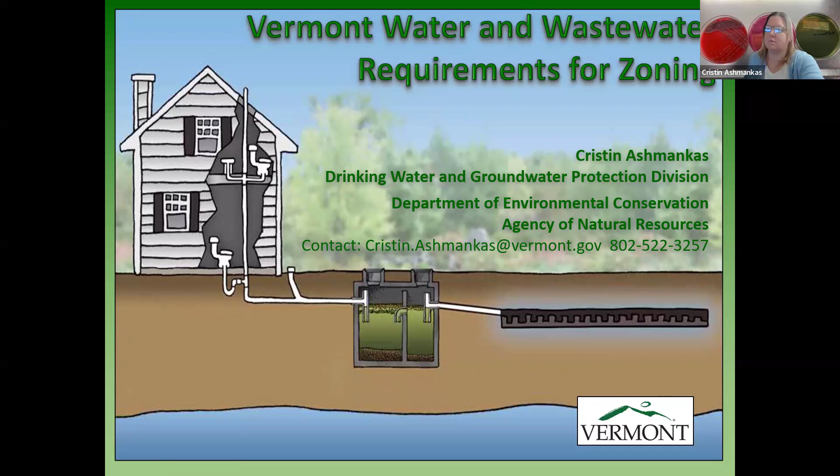Sorry, we were required to turn our keyboards in to the state of Vermont, and so I am waiting for my keyboard, my new one, to arrive from Amazon. So it's an unusual setup for me.

I am representing today mostly the wastewater system and potable water supply program. We refer to it as the WW program. It is a regionalized program with 5 offices around the state. In St. Johnsbury, we have 1 regional engineer. In Essex, Montpelier, Rutland, and Springfield, there are 2 regional engineers assigned to each office.

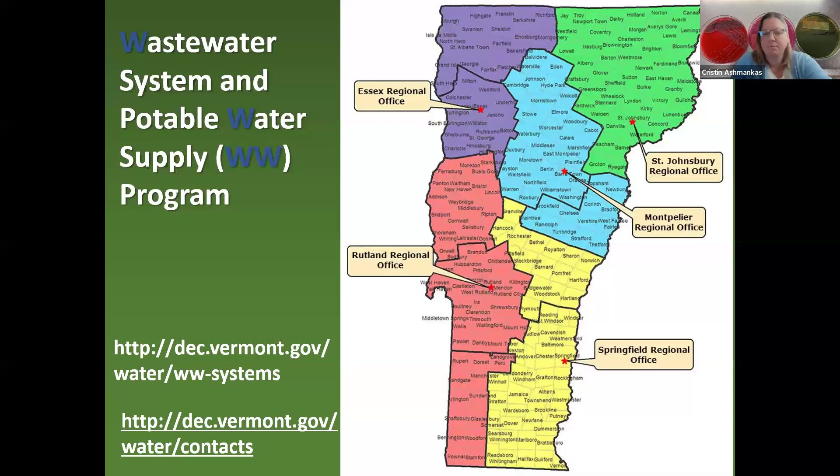The wastewater system and potable water supply program regulates all soil-based wastewater systems and water supplies for wastewater flows less than 6,500 gallons per day. It's not that when you reach 6,500 gallons per day it suddenly is not allowed, it's that it jumps up to the indirect program. The indirect program has some EPA reporting requirements that are not present under 6,500 gallons per day. Those requirements come with a lot of extra costs, extra regulation, extra reporting, so a lot of times people are trying to actively stay below the 6,500 gallons per day.

Potable water supplies are those water supplies that are not public. Public water supplies are typically when you reach 25 users for a supply, it jumps up into the public water supply. This is also sort of a gray area. We start looking at it when there's about 10 connections, definitively when there's 15 connections.

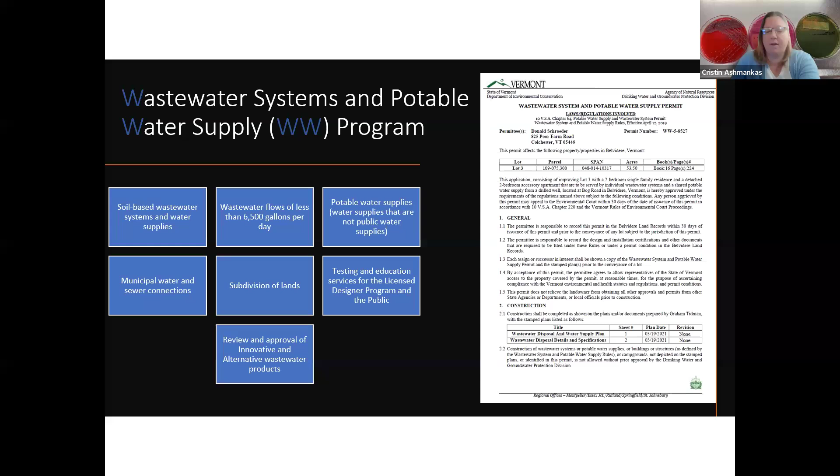Municipal water and sewer connections, subdivision of lands, testing and education services for the licensed designer program and the public, and the review and approval of innovative and alternative wastewater products.

When we look at this, this almost applies to every property in the state of Vermont. At some point in time it will likely connect with the WW program. Our permits run with the land though, so there's a very good chance they only connect with us once. Once they have their water supply and wastewater system approved, there's a good chance that just continues to operate indefinitely. We have about 3,000 permit applications a year. We were down pre-COVID to about 2,500, and since COVID we've actually sustained about 3,000 a year. About 10% of that, or about 300 of those permit applications, are for the replacement of failed wastewater systems - systems that have surfaced, backed up into the home, or reached the waters of the state, which are the definitions of failure, and need replacement of some kind.

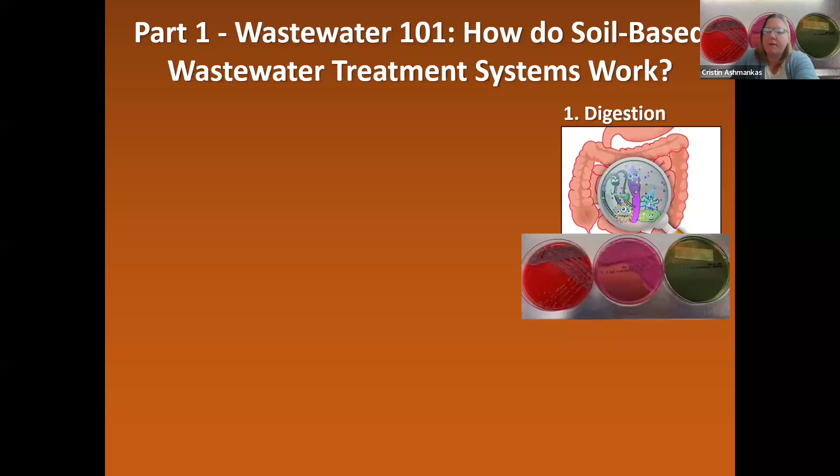A brief overview on how wastewater systems work, since that's what I'm going to focus on first. Wastewater systems start with you, it starts with your gut. You are breaking down solids in your gut into its components for your body to use. That process is mostly an anaerobic bacteria process. Anaerobes are bacteria that thrive in a low oxygen or no oxygen environment, and they are really good at breaking down solids into their components because that's what they're actually looking for - the oxygen and some of the other nutrients. When they do it to the food we're eating, they actually break it down and make it available for us.

About 60% of your solid waste is alive and dead colonies of these anaerobes, so we're putting out into a septic tank or into a municipal system vast amounts of these anaerobes. The first step to most wastewater systems is a septic tank, and that septic tank continues to reflect the anaerobic environment. It's isolated - the solids fall out, we refer to them as sludge, and they're isolated from any oxygen by a layer of water. The fats, oils, and greases, which once they hit the septic tank are referred to as scum, float to the top, further separating you from any oxygen. There's not a lot of turnover, and so this whole system settles out, and the anaerobic bacteria continue to break down solids in the septic tank. It's the reason you don't need to pump the septic tank every year.

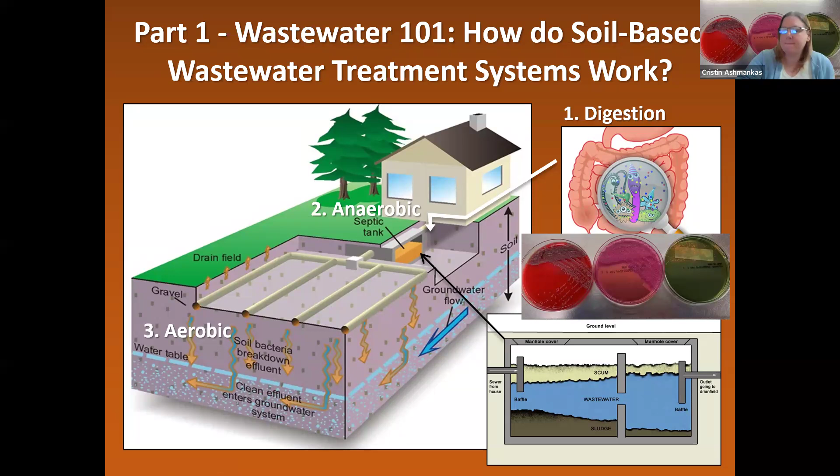Why do we care about this? We are protecting human health and the environment. We're making sure that any wastewater that gets put out is clean before it gets taken up by a potable water supply—that's typically referred to as the 2-year time of travel.

Studies for the last about 120 years have all looked at this. They put a bunch of viruses, cysts, and bacteria in an environment—small environments, large environments, natural environments, lab environments—and it all comes out the same. All the little microbes are really good at trying to dominate each other, so they've all developed ways to kill off their competition.

So if you put them all out there, after about 2 years they've made it too inhospitable for any of them to survive—a complete die-off. So we make sure there's 2 years of travel time between any wastewater getting put out in a leach field and any potable water supply. That's one of the biggest components to some of the infill discussions in the villages—we're trying to keep the water supply and the wastewater system separated enough that it takes 2 years for water from one to reach the other.

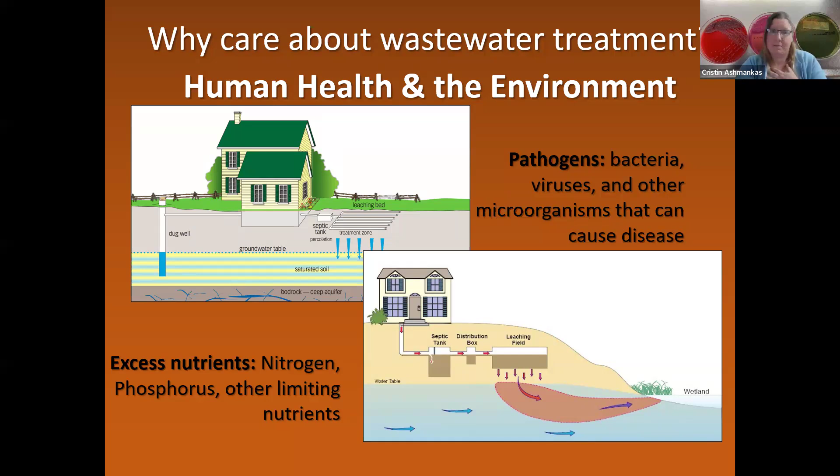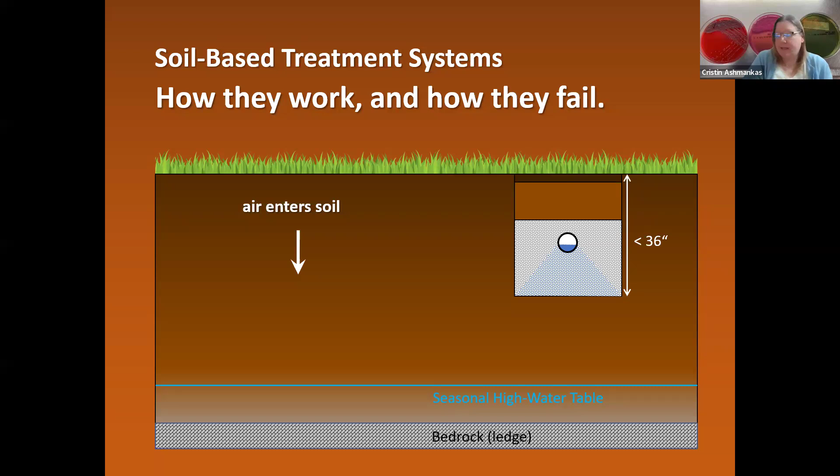Looking at the leach field specifically, we want to make sure that the water is getting dispersed in the top 3 feet, because we know that's where the best oxygen exchange happens. We want the oxygen to be there for the aerobic bacteria. So we make sure the leach field is in the top 3 feet, with 3 feet of separation between the base of the stone and seasonal high water.

If you're not familiar with a leach field, typically a traditional leach field as we now define them in Vermont—there's a wide variety here. I've been out in places where, back in the 1930s, 40s, and into the 50s, people would bury their cars as their leach field and just roll down the windows. So I've seen some interesting leach fields.

But going for the more common definition of traditional, it is a perforated pipe embedded into some stone. The stone acts as both a place for water to run through, and a place for the aerobic bacteria to adhere to as the water passes over it. At the base of the stone, we want to make sure there's 3 feet of separation.

Studies show that most of the nutrients get taken up in the first 6 inches below the stone. So by the time you hit 6 inches below, you're at about 80 to 90% of the nutrients taken up. By the time you hit a foot, you're approaching 100%. Typically by 18 inches, you're at 100%.

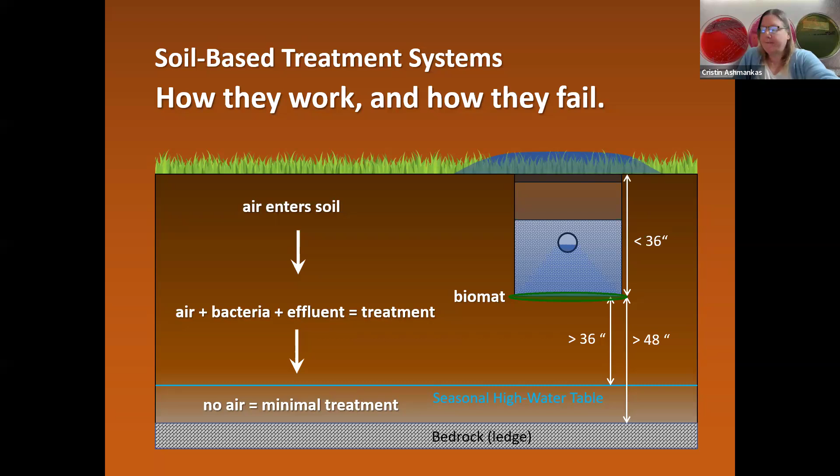So when designing wastewater systems, start with looking at the soils, right? We want to know what the soils can handle, what the soil profile is really going to define everything we can do about a wastewater system on a particular piece of property.

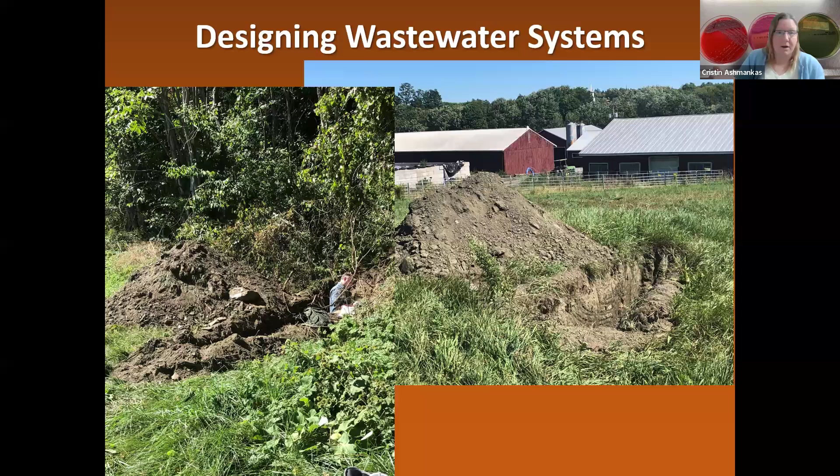So we dig these test pits, and the first thing we look at when we're looking at the test pits is where is seasonal high water? Seasonal high water is typically determined in the state of Vermont by the redoximorphic features within the pit. And the redoximorphic features are that transition from that nice rust color to soils that are depleted in the rust color. The rust color comes from the oxidized iron in soil.

I've been out to sites with the landowner sitting there, and we don't see a lot of the rust color. The landowner is like, well, maybe my soils just don't have a lot of iron in them. Turns out iron is constantly raining down on a geologic timescale and covering the entire planet. About 80% of iron in our soils is cosmogenic in origin, coming from space. Space dust is raining down, constantly covering it and integrating into our soils.

It's the reason why if you go to places that are particularly arid, you'll have beautiful red soils. If you think of arches in the Midwest, a lot of the national parks out there, that beautiful red is because it's nice and arid. There's not a lot of water present, so they hold on to their oxidized iron. Same thing with the loess in China. And if you really start driving around as the geologist and looking at the cross-cuts as you're driving around Vermont, New England, you're going to start seeing that beautiful red color in your soils.

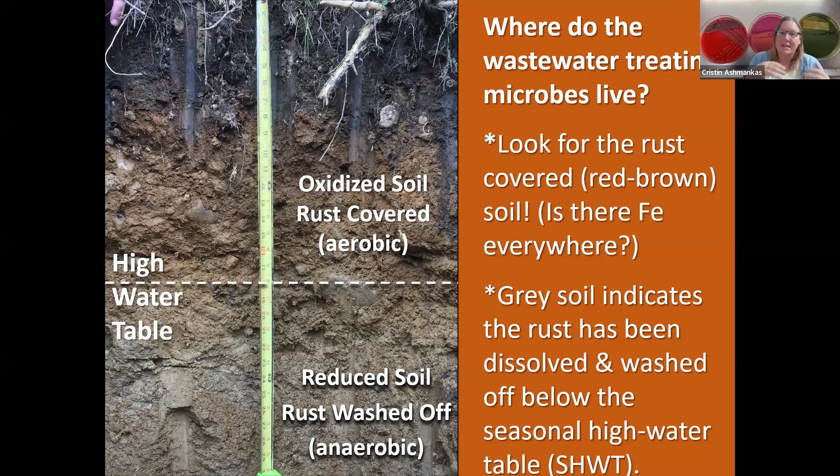We don't want too much sand either, because things will move a little too quickly. We actually like a nice mix of the sand, the silt, and the clay. Just a little bit of clay slows things down, and the sand keeps things moving. We like that nice little variety - that's ideal. That's one of the things we're looking for, what exactly is the texture, because it's going to indicate how much water I can put out per square foot that will be absorbed without surfacing.

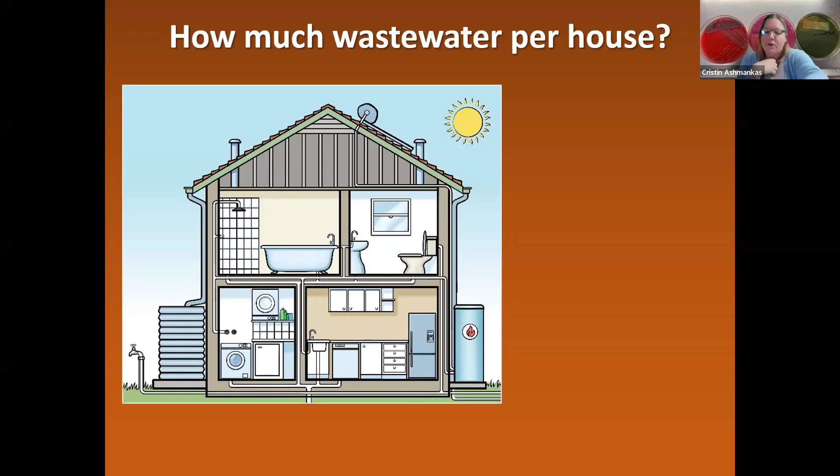Once the soils have been determined, the licensed designer is going to figure out how much wastewater is going to get used, or how much water is going to get used. This is true for both ends, and it's referred to as the design flow. In the state of Vermont, we determined that to be 70 gallons per person per day. I always have people say, I don't use 70 gallons, and I don't typically use 70 gallons on any given day. But you don't want to be using 100% of your allotted design flow, because if you do, that means you'll have a hard time doing things like hosting Thanksgiving dinner, since you won't have enough water to absorb your guests. So you shouldn't be going over about 75% of your design flow on any given day.

I also let people know, I've had a teenager in the house, and the teenager is using 70 gallons per day. So we want to make sure that whoever buys this house, they can move in with a house filled with teenagers, and this system is still going to work for them. Because the teenager's taking the hour-long shower and doing loads of laundry for one shirt, set on the high setting because they don't know how to adjust the water level on the washing machine - we've all been there. They're using their 70 gallons per day. My teenager was not only using her 70 gallons per day, she was using a little bit of my 70 gallons per day too. And our system could absorb it because we have these factors of safety built in.

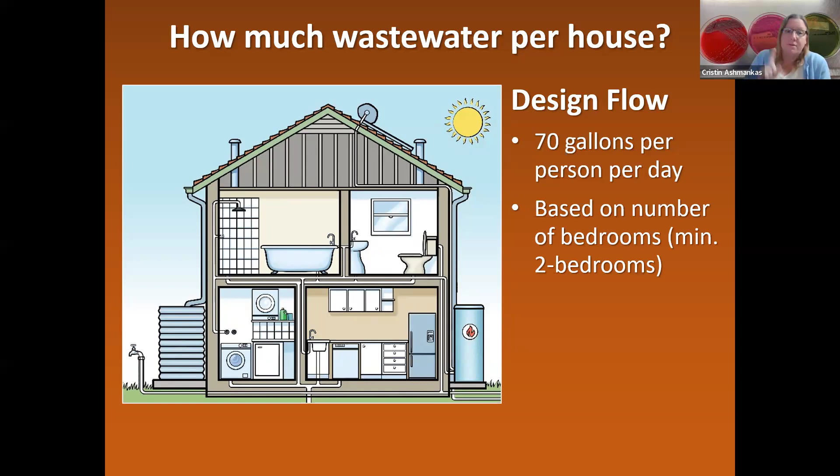In the state of Vermont, there's a 2-bedroom minimum for the first unit on a property. After that, if you have additional units on the property, they can go down to 1-bedroom units. But the first unit on a property is considered to be a 2-bedroom unit, and there's considered to be 2 people in the first 3 bedrooms as a minimum.

And one person can be in any bedroom after that as a minimum. I let people know though, right? We have occupancy on our permits. There's an implied occupancy on some of the older permits before we started spelling it out, but it is built in, however, to every permit we issue.

If you know you're going to go over your occupancy, this is particularly true around the lakes and at the ski resorts, where the 3rd or 4th bedroom is suddenly going to become a bunk room and you're going to put 4 bunk beds in there, tell us that. Tell your licensed designer that. They will build you the water supply and wastewater system that matches what you intend to use that building for, and we will put that into your permit. So you could have a 4-bedroom, but 15-person occupancy, if you have the supporting water supply and wastewater system.

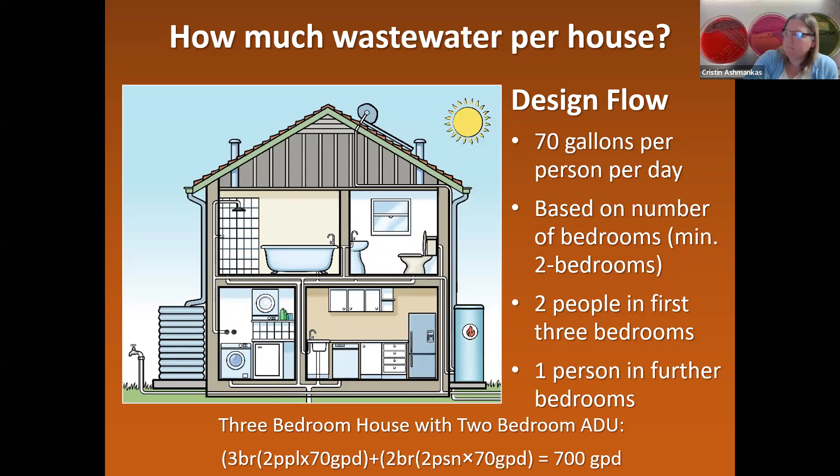To give an example, a 3-bedroom house at 2 people per bedroom, 70 gallons per day, brings us to 420. If we add on a 2-bedroom ADU, that's 2 bedrooms at 2 persons per bedroom at 70 gallons for another 280, bringing us to a total of 700 gallons per day. Once you know how much water, and we know what the soils can absorb, we start looking at where the seasonal high water is, and what sort of system can we put in on any particular property.

The first thing we're going to look at is the profiles. The profiles are sort of being driven by that seasonal high water. So if we have nice, deep seasonal high water, nice deep bedrock, we can put an in-ground system in. We dig it in, we lay out our system, we cover it all back up. Nobody ever has to know it's there. This is the system that everybody wants. Nobody ever has to know. You can put your playground right over it. It's good to go. If you're exactly 3 feet to seasonal high water or exactly 4 feet to bedrock, you can just move off the organic layer, lay out your system, cover it up. It sort of looks like a little natural blip.

This is known as an at-grade system. When you don't have 3 feet to seasonal high water and you don't have 4 feet to bedrock, suddenly we have to start manufacturing that separation. That's when we bring in some sand and soils and we build mounds. Mounds are those, I'm sure you've all seen them. They're nice systems that come up and everybody sort of knows where your leach field is. It's building that artificial separation.

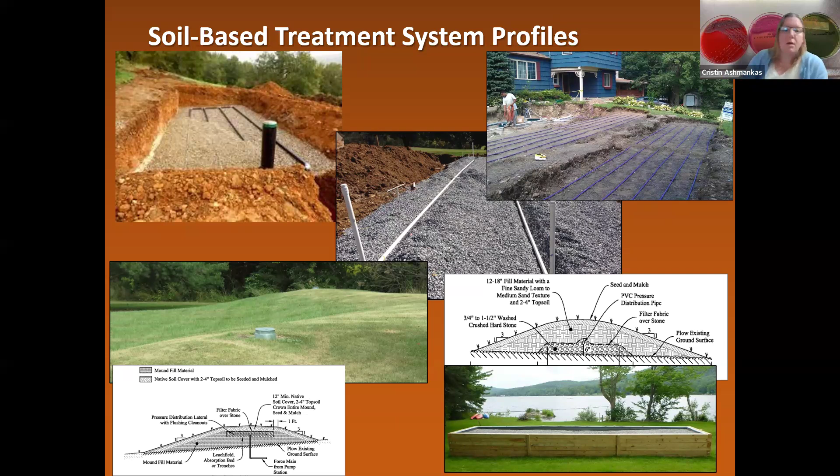We have what are known as innovative alternative systems in Vermont. These come in mainly two flavors. The first are innovative alternative dispersal systems. The classic one, most commonly used in Vermont, is the Presby pipe, although it's actually no longer called that as of last year. It got bought by a different company, and they didn't buy the name, so it's now being called EnviroSeptic pipe. I like to still call it Presby because Presby pipes were invented and are still manufactured in northern New Hampshire. One reason they're so popular in Vermont is because they can be locally sourced. The second reason is that they were designed for a similar landscape.

The nice thing about innovative alternative dispersal systems is that you can hand carry them to your site, whereas a traditional leach field requires large beds of stone. You need a large ton truck filled with stone to get to your site in order to make a leach field. That eliminated a lot of areas in New Hampshire and subsequently Vermont where you could put a leach field, because you just couldn't get that big truck full of stone somewhere. That's eliminated with Presby pipes, they act as the stone and pipe system. This is the Presby pipe, it's perforated all the way around, and it's wrapped in a proprietary geotextile fabric that acts like the stone.

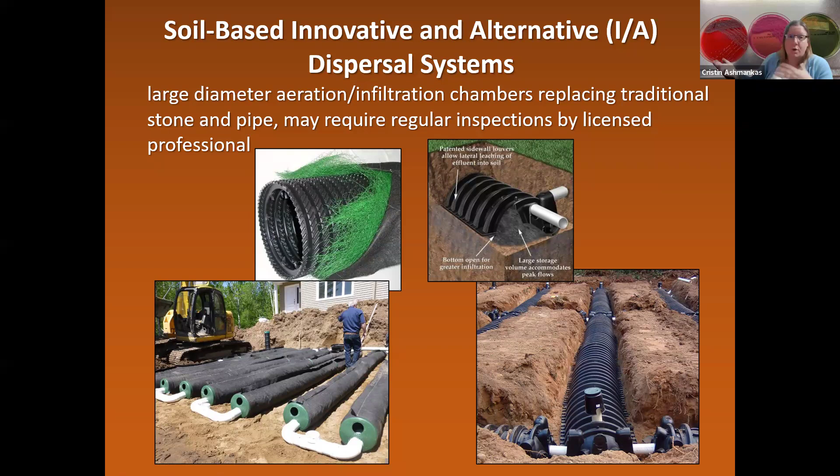The other flavor we have for innovative alternative are innovative alternative treatment systems. The treatment system provides an aerobic environment before the wastewater hits the leach field. By providing that aerobic environment prior to the leach field, we can get the water about 80 to 90% clean before it gets there.

Some of them claim the water gets so clean it's drinkable. In fact, there are at least two companies approved in Vermont that require their salespeople to drink the end product. I would not recommend that, mainly because it doesn't guarantee anything for the pathogens. Our viruses and cysts are not eliminated through this process. The only thing being eliminated is the nutrients.

Water comes in at one end, and they all operate on the same sort of component. Wastewater comes in, oxygen is somehow mixed with the wastewater along with aerobic bacteria, the nutrients get taken up, the bacteria settle to the bottom, and what's left behind is mostly clean water.

This one does it by injecting bubbles down below with a stir. All of them monitor the wastewater product to make sure they're doing a good job. This one, the bubbles are injected below a media, and the aerobic bacteria grows on the media and takes up the nutrients.

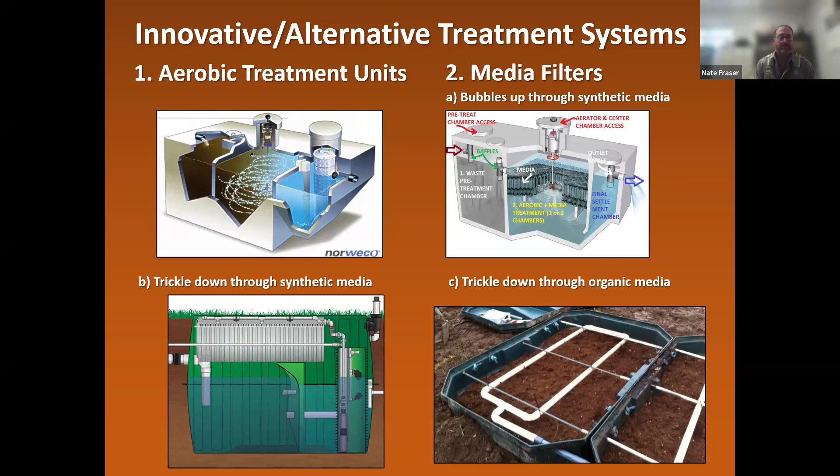So just as a refresher on the scope of the rules, we regulate systems that are 6,500 gallons per day or less and all municipal connections to water and sewer.

When we're connecting to water and sewer, what we're permitting is to make sure, one, that everything actually flows in the direction it's supposed to. You'd be surprised how many times we get plans where water is expected to flow uphill without a pump station to assist it. And we have to check the box that says, maybe that's not the best plan here.

We also make sure that water and wastewater are separated by at least 10 feet, because we know that these systems leak. We want to make sure that the leak in your water supply is not getting too close to the leak in your wastewater system, so there isn't cross-contamination. So we do that with 10 feet of separation.

And then we also make sure if you do have any components - so if you did decide that your wastewater system was going to be taken up by a municipal step system, which is an option - we're going to make sure that the septic tank you're putting in to then connect into the step system is sized appropriately for your house.

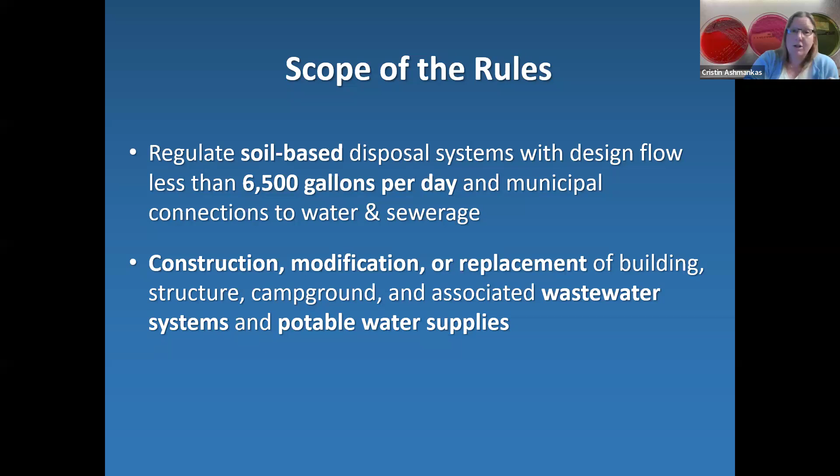We do the construction, modification, and replacements of buildings, structures, campgrounds, and associated wastewater systems and potable water supplies. We are the only permit that's universally required across the state for any of these components. So we try to give feedback on some of the other stuff, just as FYI, although we don't actually regulate any of the other things.

Conscious of time - so the purpose of the rules, as I already mentioned: protect human health and the environment, regulate design, construction, modification, operation, and maintenance of wastewater systems, and increase the accountability of designers and installers.

Designers in the state of Vermont are licensed. We have 4 classes of license that determine what you can work on - everything from just being able to do a single family residence with an in-ground system up to PEs, which can pretty much design anything.

Installers in the state of Vermont are not licensed. We're one of the few states with on-site wastewater systems that does not have a license program for installers. I am trying to close that loop. I have worked with now the Vermont State University, used to be VTC, and we have created a certification program with them for installers. We have about 40 certified installers now in the state of Vermont.

We can't require that an installer be certified, because that's edging too close to licensure. But we do have on our website a list of people who we at least know have read the rules at some point and been introduced to them in a class.

Service providers also have a certification program. It's not required, but we highly recommend it. A lot of the service providers for the innovative alternative technologies have come in and become certified through the Vermont State University program that we set up.

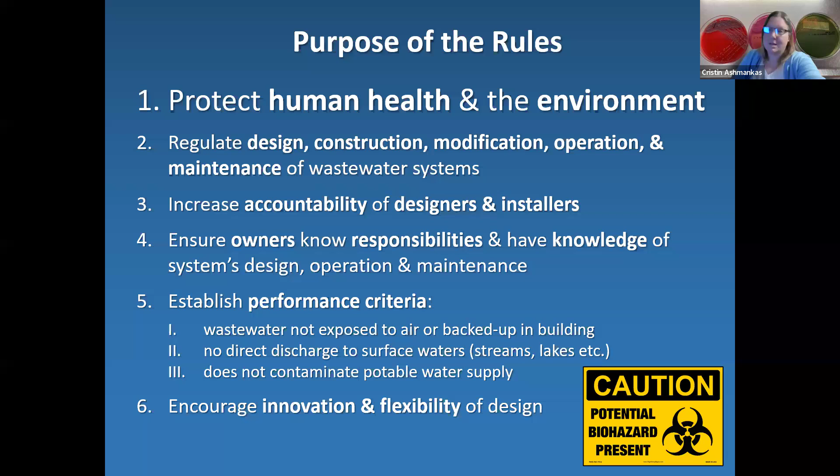Permit requirements include the plans. On these plans, I like to show it because the water supply has to be shown. It's going to have a diagram of the pump, and what the line between the well and the house looks like. If this was a municipal line, it would show that municipal line the same way. Then you have the house - we don't need to know the actual shape of the house, this could predate anybody designing an actual house, but we want to know its location.

Then it's going to show what the line coming out of the house looks like. In this case, it has details and specs for the septic tank. This one goes to a pump station, which then goes to a force line - again with details and specs for all of it. Coming around to this mound system, we're going to set the number of bedrooms and occupants for the house.

And then around the well, you'll notice this red line. That red line is the isolation zone around the well. The isolation zone marks where you cannot put a leach field. The reason for it is this is our 2-year time of travel - this is how much space we need given typical site conditions to ensure 2 years of travel between where we're taking up water and where wastewater is going to get put out.

Same thing around the leach field out here - we have this blue line, that's the leach field's isolation zone. So we would not permit a potable water supply inside that blue line. These two could cross, though - this blue line can come into the well's shield right up to the well, so long as the well itself is not in the isolation zone.

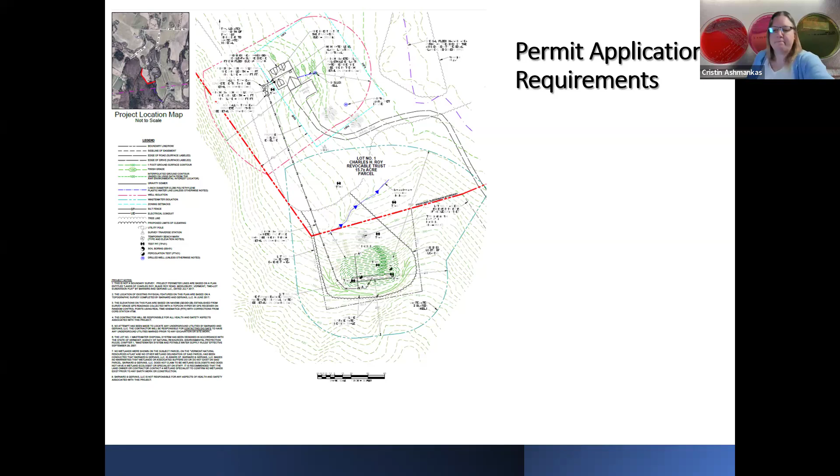Oh shit. I covered some of this, right?

Do you have to have a potable water supply? We get this question a lot, especially right now with ADUs. A lot of people are trying to build ADUs without a water supply. I can't explain it, but the state of Vermont has determined that for a building to be habitable, it has to have piped water to it. I get asked a lot about people wanting their renters to hand pump from somewhere instead of piping it into the house.

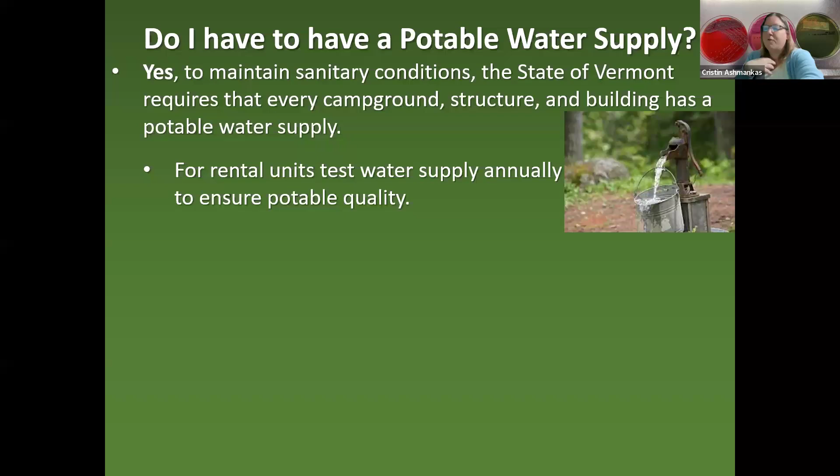For rental units, water has to be tested annually. If a potable water supply is surface water, you may not rent your building or structure, but surface water is otherwise allowed in the state of Vermont. It just can't be rented out, which is becoming a big deal with some of these multi-unit houses or when people are adding ADUs.

Collected rainwater may not be used as a potable water supply. Again, it's a very popular ask with some of the ADUs. They'd like to collect rainwater for their rented out ADU, and that is not allowed in Vermont.

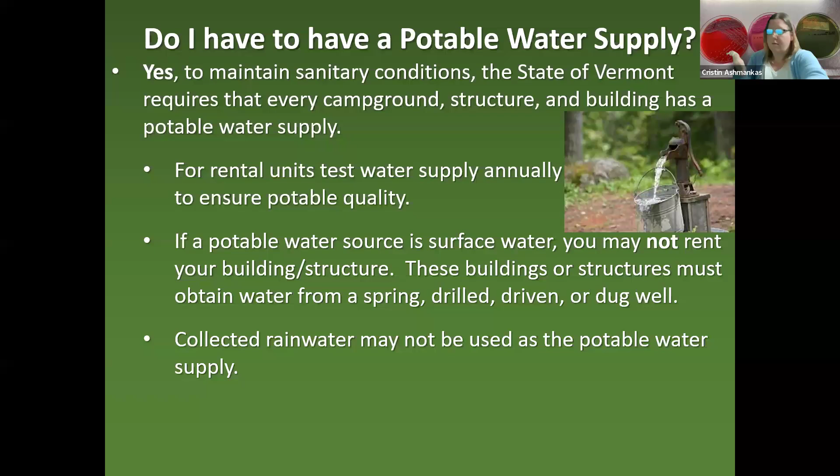Where could you find answers to your questions? A licensed designer can always answer your questions, or you can contact your local regional engineer. They all have assigned towns. Feel free to go onto the map and figure out who your local regional engineer is, or I can help you out and give them a call on anything. If it's a compliance question, I am the compliance manager. And if it's anything to do with the program above and beyond what we can answer, you can always contact the program manager, Bruce Douglas.

Any other questions? I think I covered almost everything I got asked to go over. Looking down the list real quick, but I'll take questions. I think there are some in the chat, right? Oh, I'm sorry, I couldn't see the chat. Let me see if I can bring that up. Let's just have you ask the question rather than try to find the chat.

This is Jill Appel. In West Windsor, we've identified a few locations for potential affordable housing, and a couple of them will hook up nicely to town sewer. But we have a couple of other ones that we might want to look at alternative designs. So I'm just trying to figure out, maybe we should reach out to our regional engineer and talk about that, in terms of our approach, because I think we need some design studies. One of them has access to town sewer, but we have to build a pumping station, so an alternative system might actually work better. It's hard to say. It may, right?